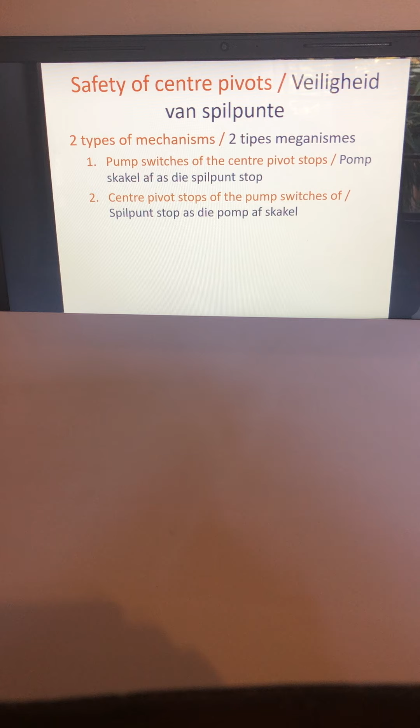Hi everyone, so this next video is going to be a continuation of center pivots and of what we did last time. So if we look at management of center pivots, look at switching it on and off.

So firstly, make sure that there are no obstructing equipment. So that is while the center pivot is moving, make sure that there's nothing in the field that could be damaged or that could damage the center pivot while it is finishing its movement.

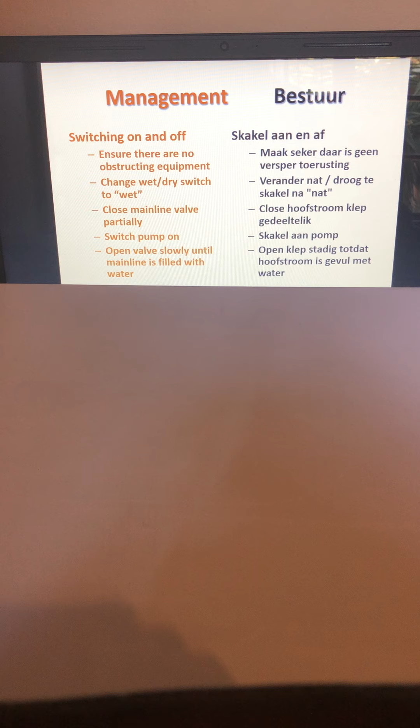You change the wet dry switch to wet, and you close the mainline valve partially, and you switch the pump on. Open valve slowly until the mainline is filled with water, and then change the main switch to on position. Set percentage switch, select and press the ahead reverse switch and stop the system. To stop the system, change the stop run switch to stop.

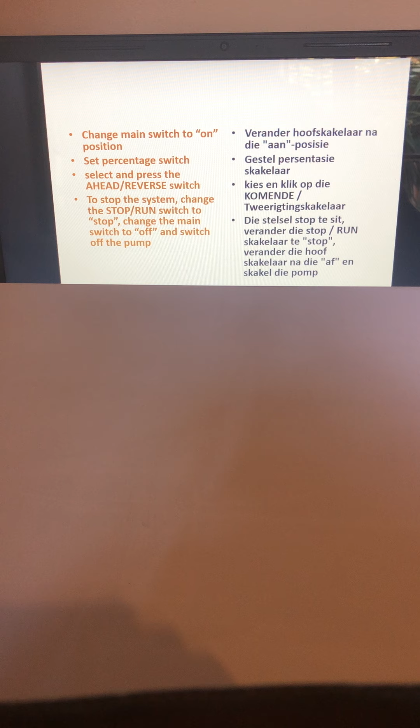Okay, so next up we're looking at water application with center pivots. So it's very important because with center pivots you've got this span or bar that is so far above the soil that you have a lot of loss of water, and it's not always the most effective method. So with center pivots, you are trying to limit your water loss to as little as possible.

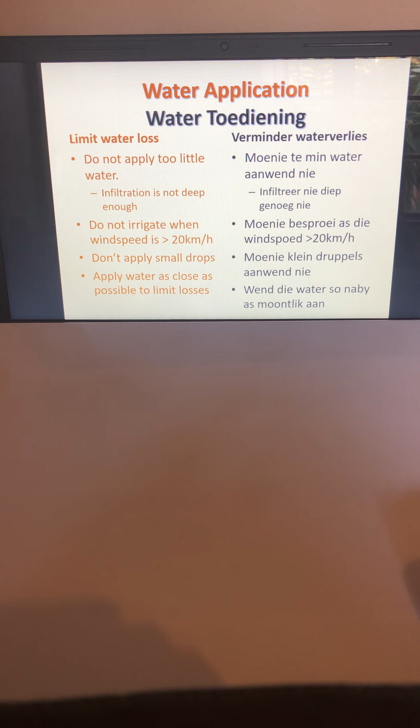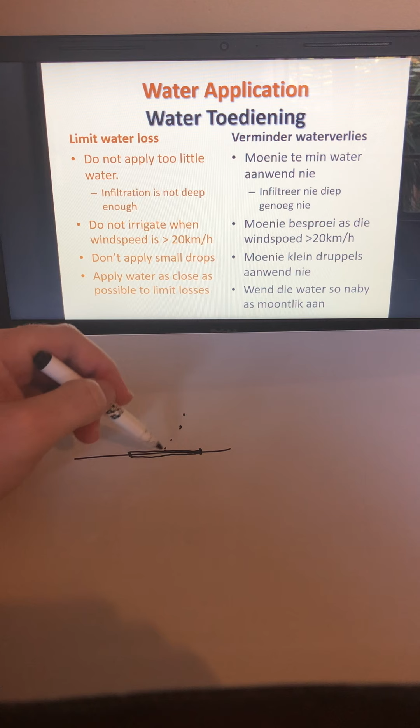So do not apply too little water, and that is because if you won't apply enough water, the water won't infiltrate deep enough, and so you'll lose a lot of water due to evaporation, and also your roots will grow too shallow. So if this is your soil surface, then if too little water falls on the surface, it'll only stay in that area, so you'll lose a lot due to evapotranspiration. And what you would prefer is for the water to actually go down deeper into this profile.

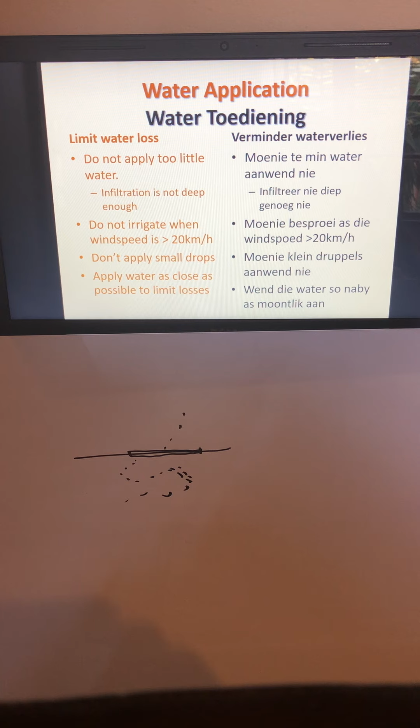Do not irrigate when the wind speed is quicker than 20 kilometers per hour, and this is just to make sure that your wind doesn't blow your drops away or cause the drops to evaporate too quickly. So don't apply small drops for that same reason, and apply water as close as possible to limit losses.

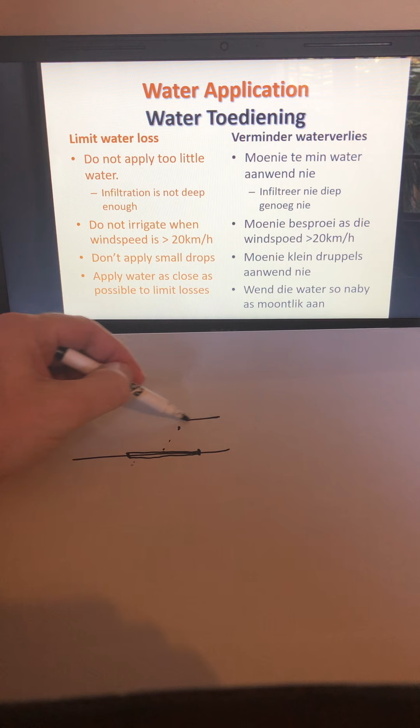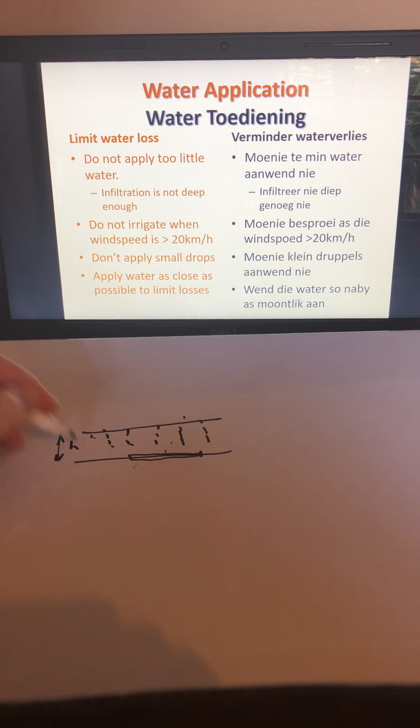And that just refers to if this is your soil profile, and that is the bar that is delivering water like this. Make sure this bar is not too high from your soil profile in order that you don't lose any water on your soil profile. So we can actually calculate how you deliver water to your crops with a center pivot.

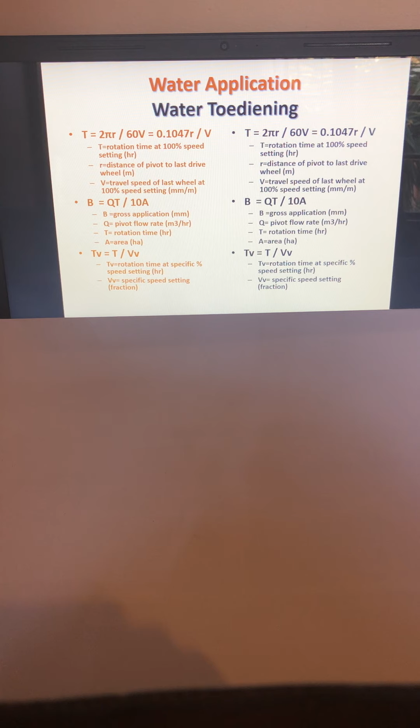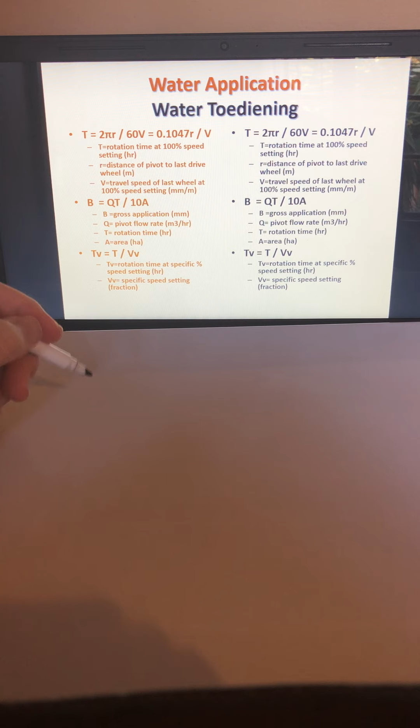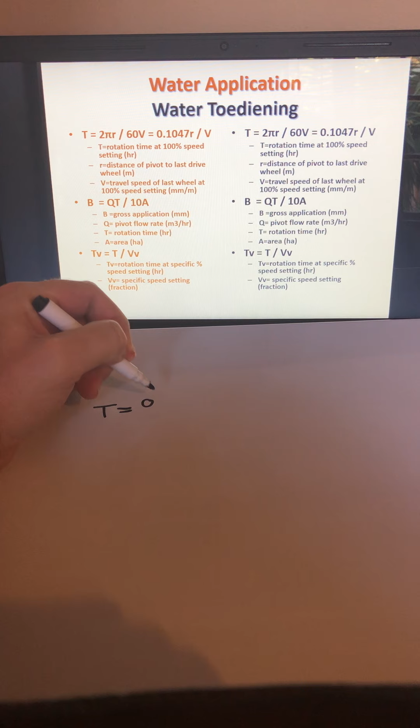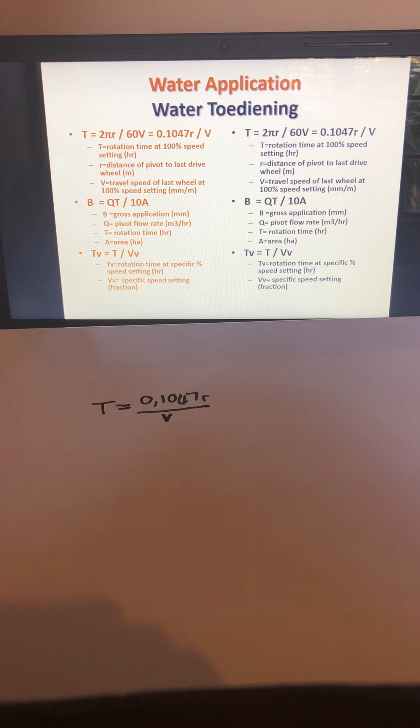So these are the three important formulas to know and remember for center pivots and irrigation with center pivots. So this first one, T equals 2πr over 60V, but to simplify it, we'll just say 0.1047 r, so that's the radius, divided by V, which is the travel speed of the last wheel at 100% setting.

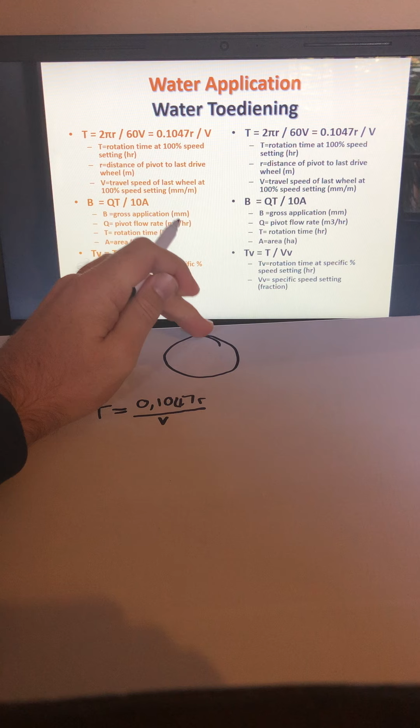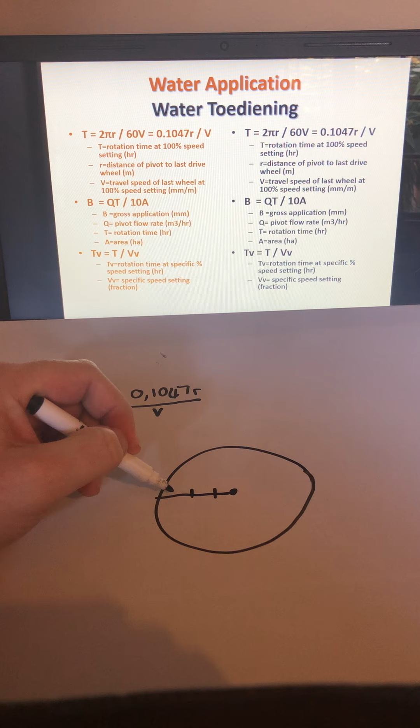So if I can sketch this, maybe you've got a field that looks like this, and this is your center pivot that's moving around. And so maybe I'll redraw that just a bit larger. So you've got a field like this, and this is your span, and then this is where the wheels are located.

So this equation refers to the time in hours for this thing to rotate. In other words, when we're looking at the radius in this first equation, we'll take that wheel. We don't take this whole area, but only that wheel. And so that is why that R value for radius is the distance of the pivot to the last drive wheel, which is there. And V is then the speed of this wheel around.

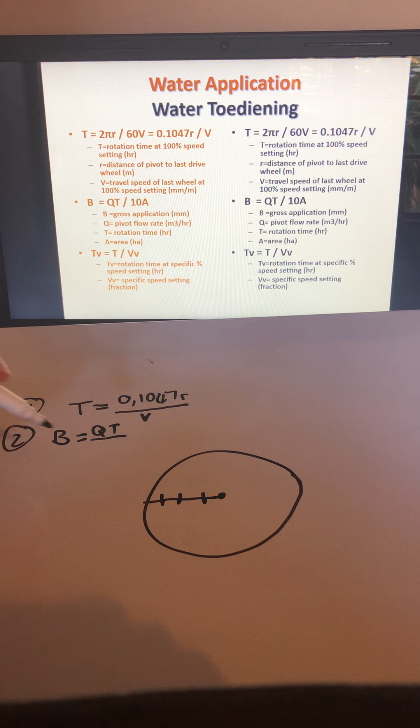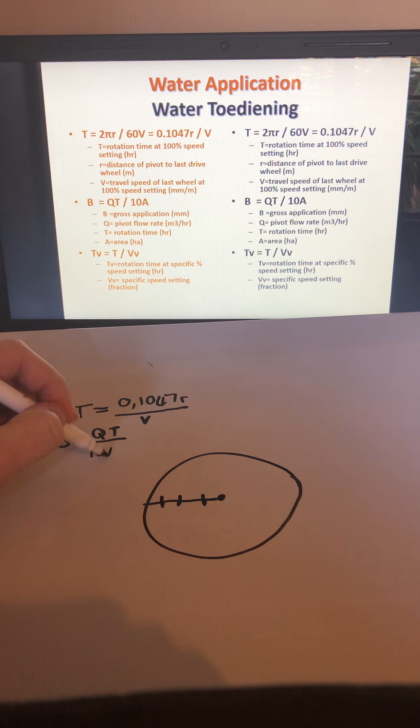The next equation is gross application, bruto toediening in Afrikaans, and that is the amount applied to the soil. So that'll be Q, which is the flow rate, so the rate at which water is leaving the sprinklers on the center pivot. T is the rotation time, so that's what you calculated in this first equation, divided by 10 multiplied by A, and A is the area of this whole field.

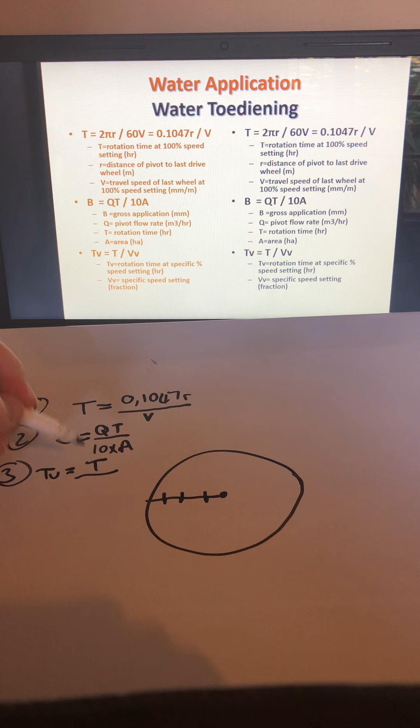And the third one is the rotation time at a specific speed setting. So this time is when your center pivot is moving at 100% speed, at full speed basically, and this equation is if you're only moving at a specific speed, so 70% of full speed or 50%, etc.

So these are the three equations that you need, and let's do one example of this. So the question is, determine the revolution time and gross application at a 70% speed setting for the following case.

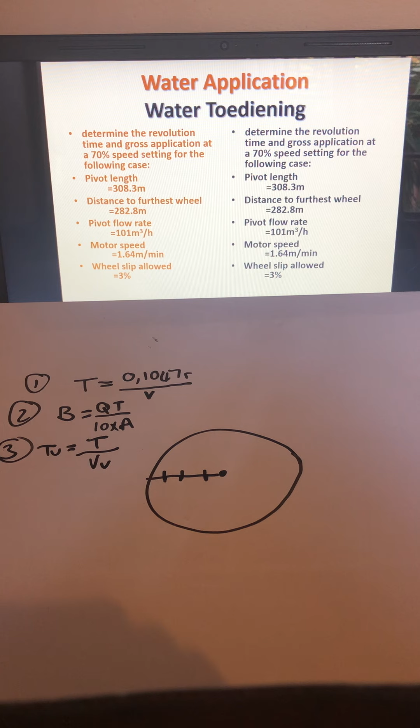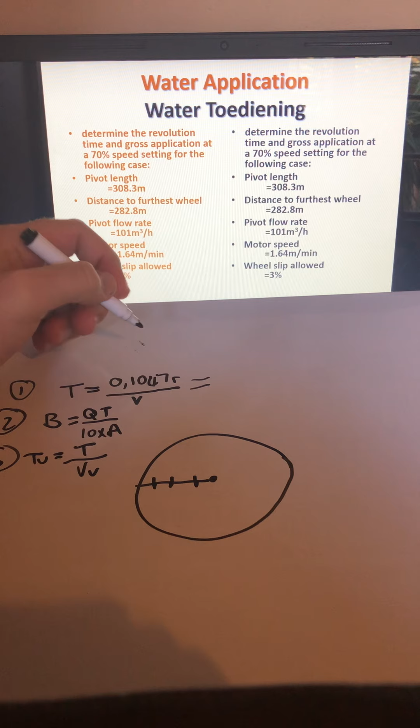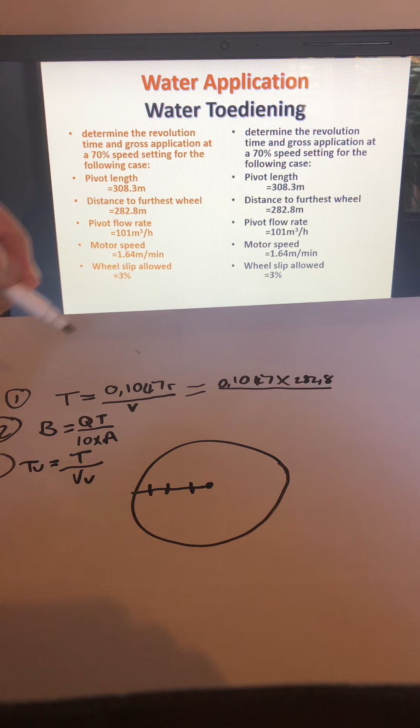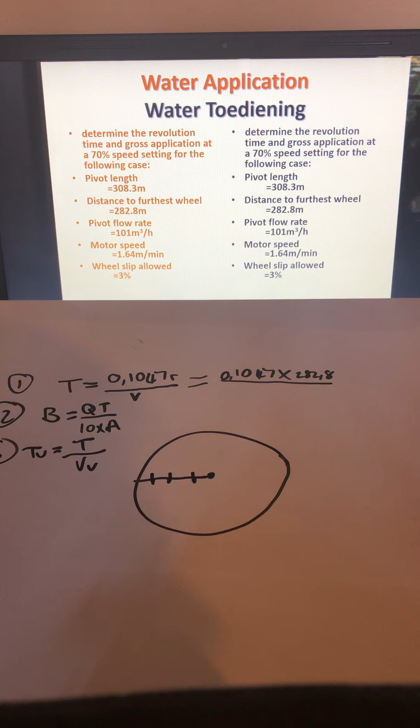Okay, so if we can do equation number 1, the time for this thing to rotate is 0,1047 multiplied by the radius of this wheel. So from the center to that wheel, and that'll be the distance to the furthest wheel, so it'll be 282.8 meters divided by the speed at which it is moving. So for that speed, just to make sure, if you are calculating it for that speed, it is 1,64. So that's how quickly this thing is moving.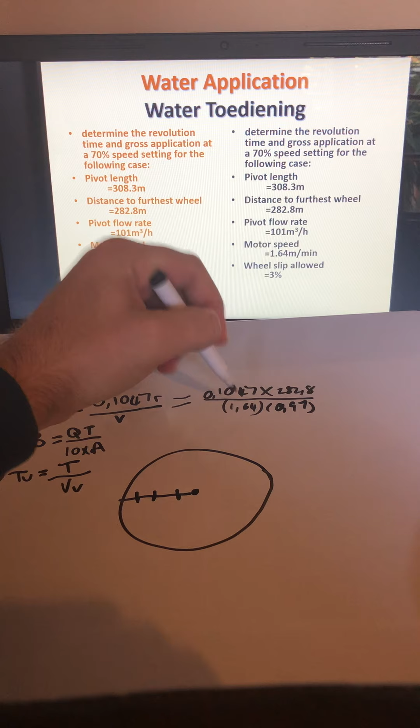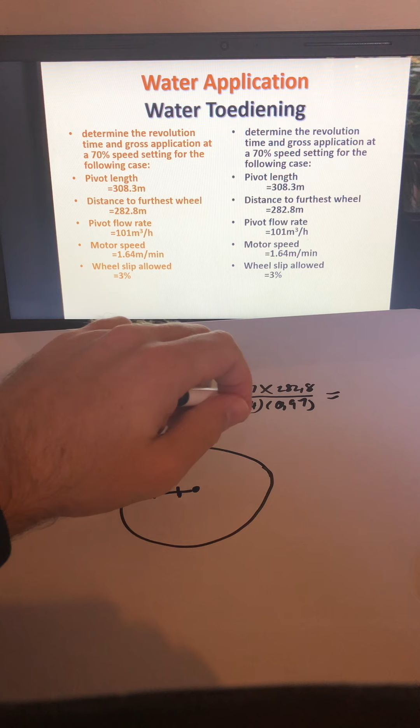But this says the wheel slip allowed is 3%. So 0,97, because that is 100 minus 3%. That's 97% of the actual motor speed. And the answer that you will get for this, I can quickly get my calculator. So your answer for this will be 18,6. So you write this 18,6 in terms of hours. So your answer will then be 18,6 hours.

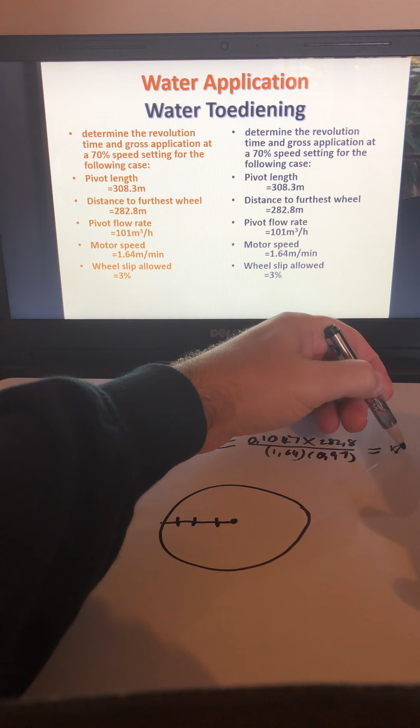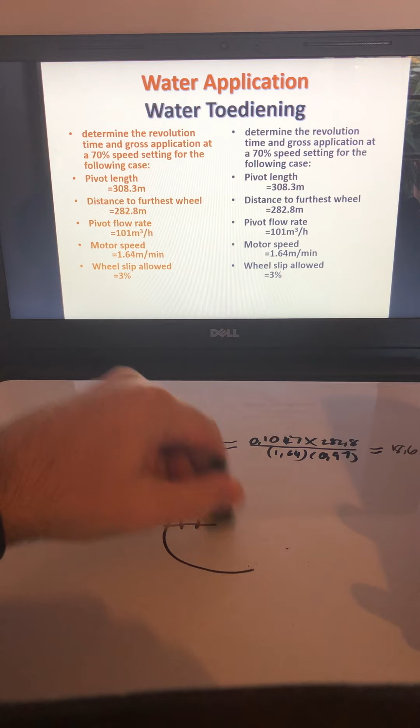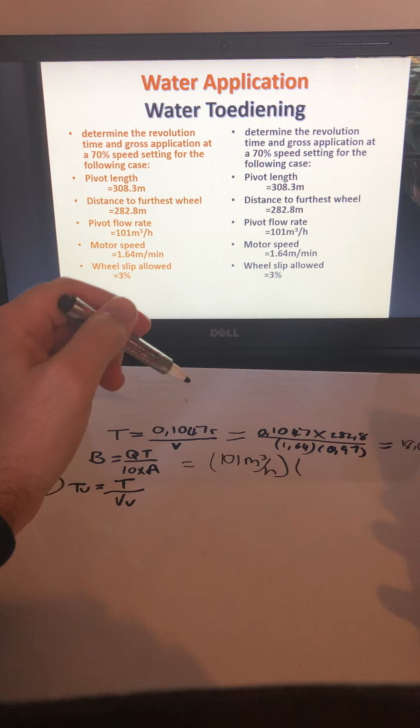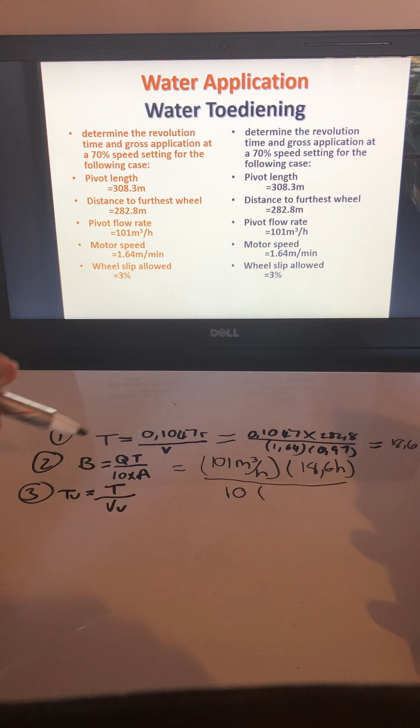Okay, so this next one is the gross application, and you want to determine how much you're going to apply to this field. So Q is the flow rate. It's at 101 cubic meters per hour, multiplied by T. So T is the time it took to do a full rotation, and that is 18,6 hours, divided by 10 multiplied by the area. So that is the area of the whole field.

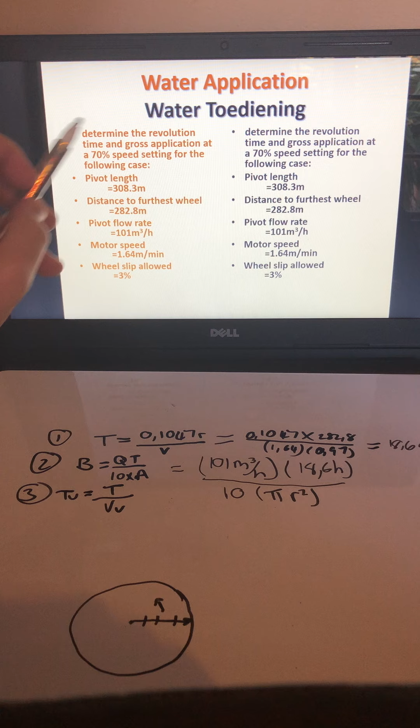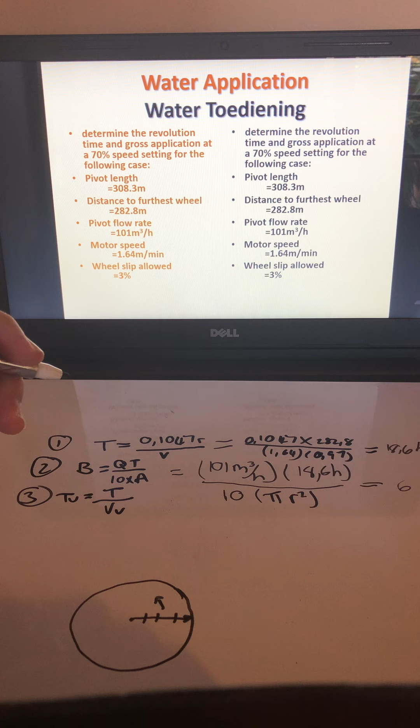So if you've got the field as it was sketched like this, and this is your center pivot moving, then the area of this whole field is going to be pi times the radius of this field squared, and the radius of this field is 308.3 meters. And so if you put that into this equation, the answer that you will get is 6.3, oh sorry, that is 0.63 millimeters. Okay, so that is the application.

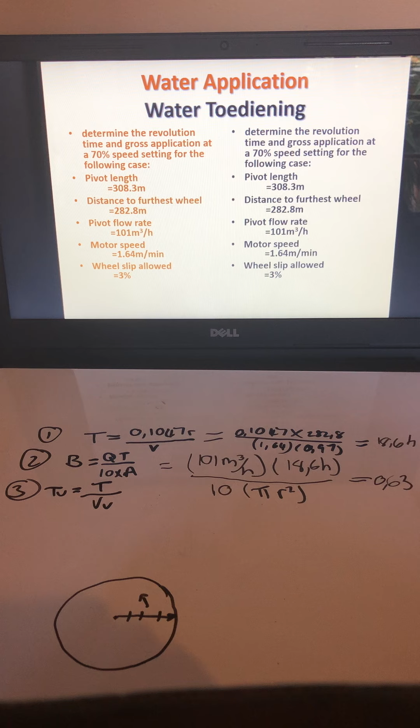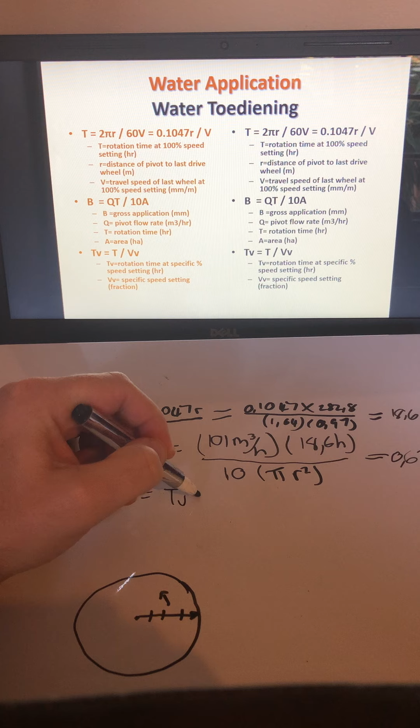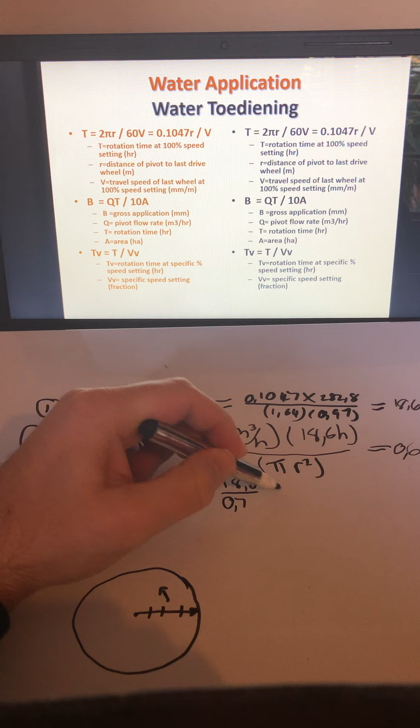And then lastly, you want to know the speed setting, if the speed setting is at 70%. So if we can go back here, they say the rotation time at a specific speed setting. So the speed setting was at 100%, and you want to know when it's only moving at 70% speed, what will the time be? So that'll be TV equals 18.6 hours divided by 0.7, and that'll be 26.6 hours.

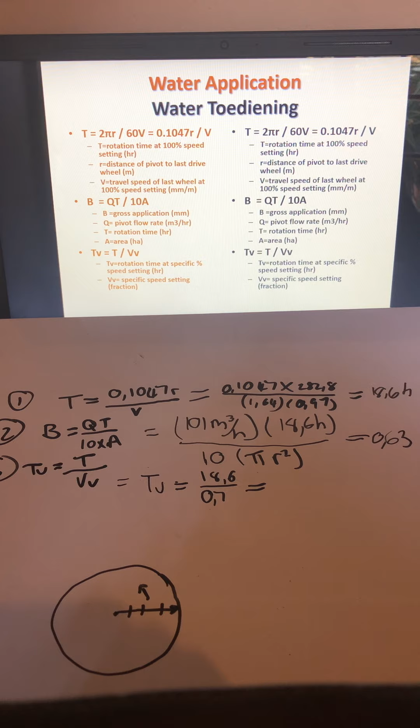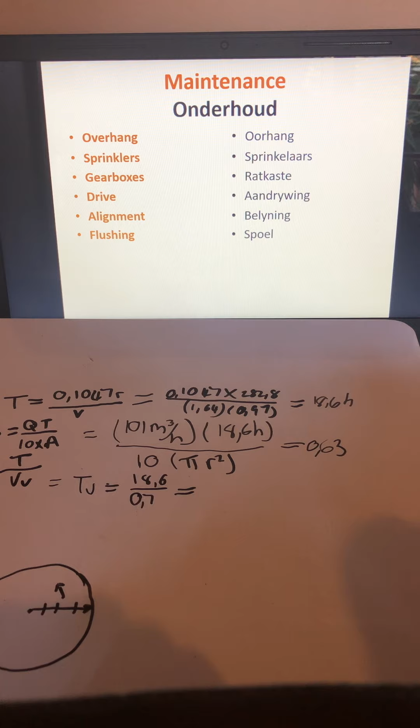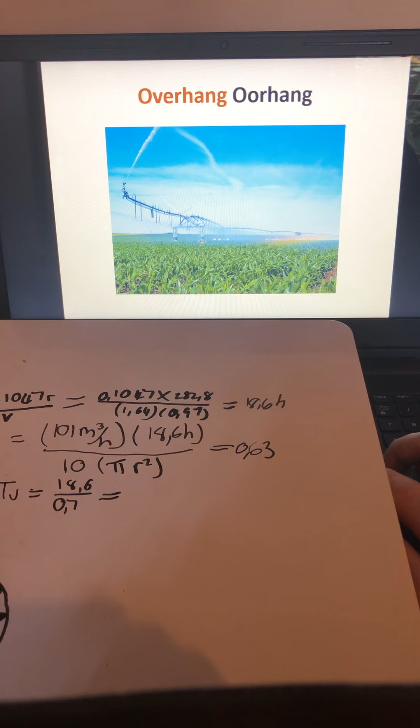Yeah, and so from here on, it's important to remember to do maintenance. So maintenance on your center pivots, if you're looking at the overhang, Afrikaans die oorhang. So if you remember from the previous video, it's just this extra part at the end. It usually gets clogged up with a lot of dirt and sand. So it's important to remember to clean that and the sprinklers. So you have to have a sieve and make sure you clean the pipes and the sprinklers.

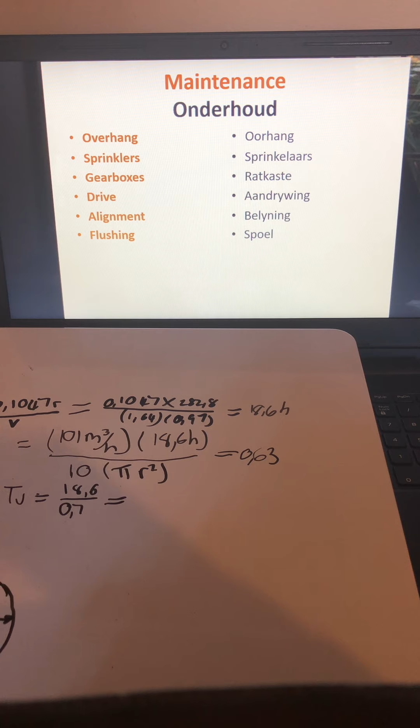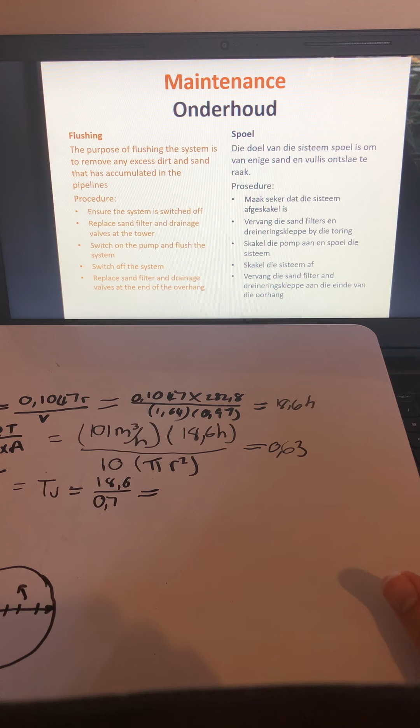Your gearbox, try to oil your gearbox at the end of every single season. Drive your alignment, so that's the alignment of your whole structure, and then flushing. So lastly, flushing is especially for your overhang that becomes full of sand and dirt. The purpose of flushing the system is to remove any excess dirt and sand that has accumulated in the pipelines.

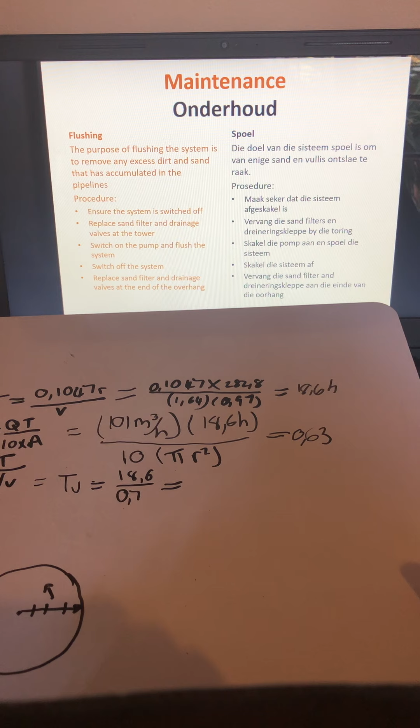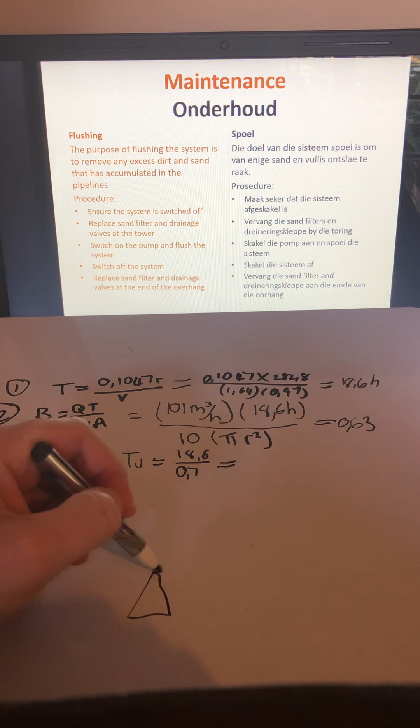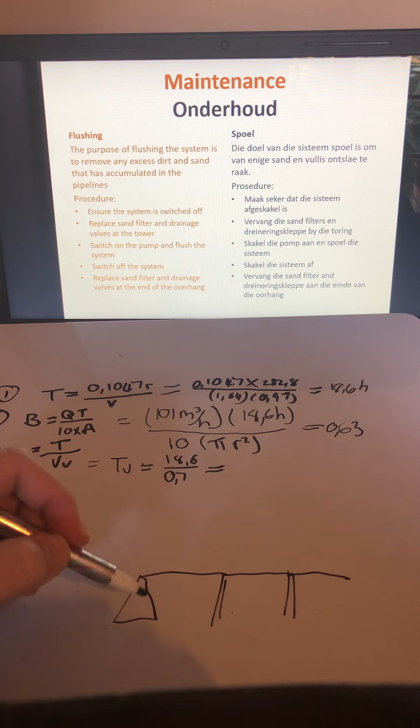So in order to do this, you switch off your whole system, and if I can sketch this. So if this is your system, this is your center tower, and then you have your center pivot like this. So switch off this whole tower, and then this whole thing, and then you'll clean the filters and the valves in this tower, so the water goes through and it is spread across this whole span throughout the whole center pivot, and it delivers water.

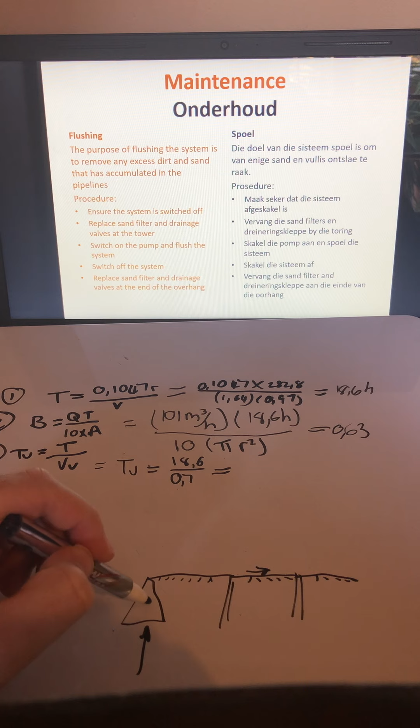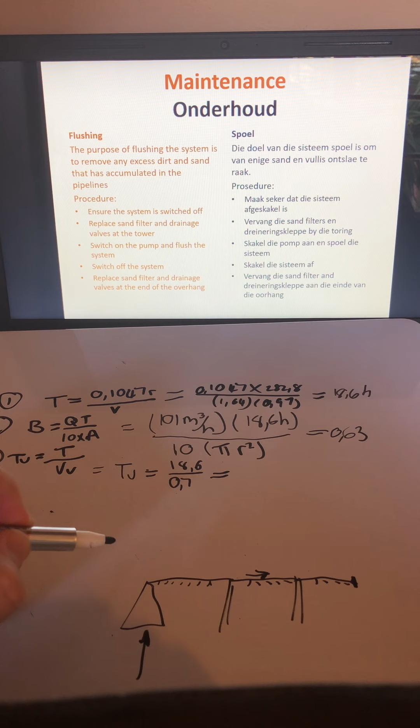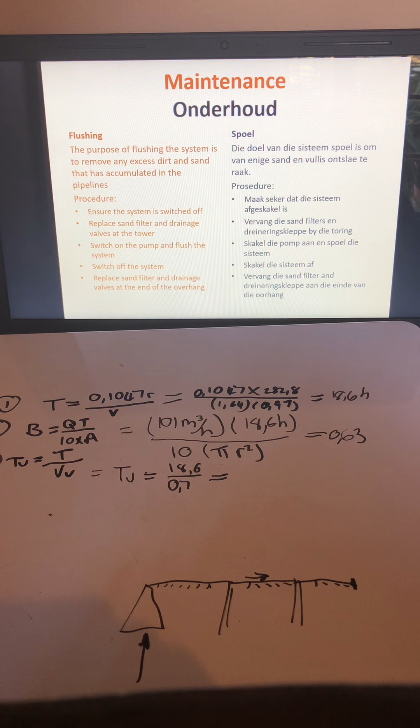So you firstly replace these valves and filters to make sure that the water that goes through the rest of the center pivot is clean. Then when all the dirt has accumulated right here at the end, you switch it off again and clean out these filters and valves at the end, and then switch it back on, and then the water throughout the whole center pivot will be clean. And that is it for center pivots.